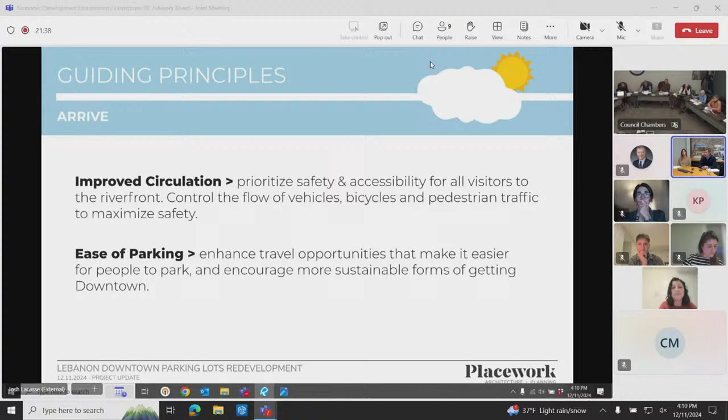They're not new. Improving the circulation for both vehicles, people, bicycles is a key goal, along with ease of parking. So making it easy for folks to get downtown, to park downtown, and in case of scenarios which provide housing, to store their car near where they live.

And finally, along the lines of sustainability, making sure that this project can be feasible without excessive subsidy from the city. Site sustainability, of course, we're on a riverfront, looking at ways of optimizing the natural environment and making sure that we are designing for resilience, etc. And of course, looking at both the direct economic benefits to the city and also the spin-off benefits of economic development, enhanced opportunities in the city, etc.

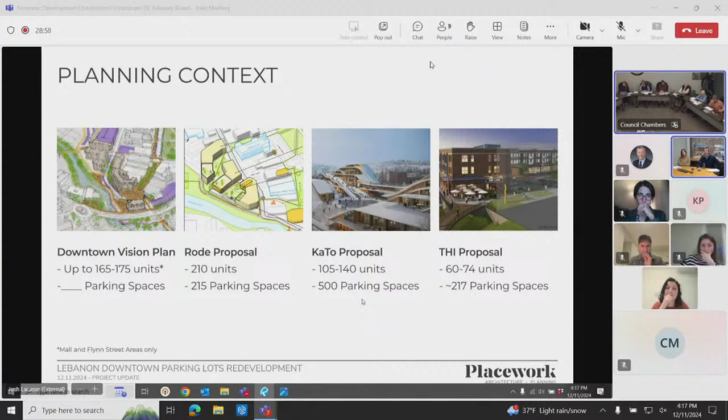So just for context, I think it's helpful to look back at these and understand what the various proposals were suggesting. When we go through our proposals or scenarios tonight, we're sort of falling between these two ones on the right as far as the number of housing units, although nowhere near the 500 parking spaces of the KaTo proposal.

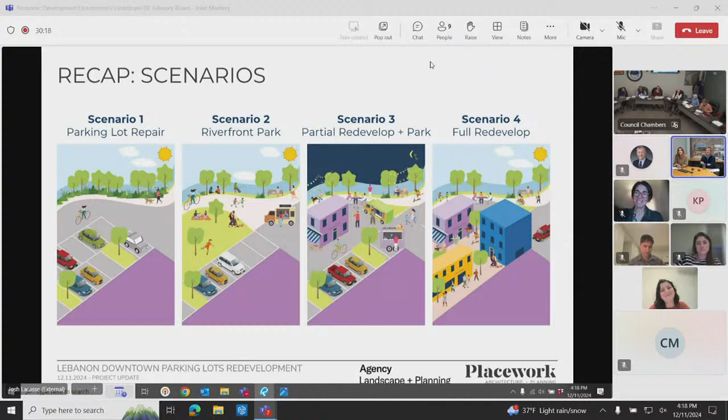And then the other thing I would say is that our materials are in flux. This is an in-stream presentation. You may see some numbers that are slightly off from the advanced packet you received. That's because we are continually working, even this morning, to revise everything. So bear with us, but the material you see now should be substantively similar to what you received in your packets. So Kate, do you want to take it away?

Sure. First, I'm going to walk us through our engagement efforts. So our flow for each of these scenarios, we'll be talking about engagement, talking about some precedent images that we drew some inspiration from, and then showing these overall site plans for each scenario.

So that summary slide from the previous slide where we're showing the different scenarios, we presented the concept of these at a September engagement meeting, as well as gave the guiding principles of the circulation and connection to river and asked for folks to add their comments to each of these. And so this is what we heard.

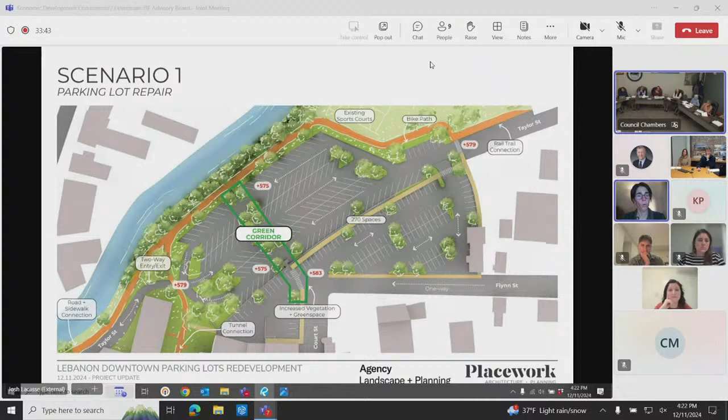You can also see that the parking lot is greener, and we've accomplished some of that extra space for the bike path by compressing the parking and making one-way drive lanes with angled parking. So as you come from Taylor Street, you have a kind of obvious one-way loop through. If you're moving through on Taylor Street, you can park or loop back to find additional parking opportunities. It's a little bit more intuitive and a little bit more compressed. We've lost a couple of parking spaces due to that additional greening and the opportunity to connect along the river, but still have the 270, which meets that core goal of existing capacity.

So if you go to the next slide, you'll see this in a perspective view. You're flying over the community center and the futsal courts right now. Looking at that parking area, you can see again that widened buffer by the river, the opportunity to bring a really generous bike route and rail corridor through there. And then the green parking lot with that green corridor that connects from Court Street directly down through the parking lot, with much safer pedestrian connections to the riverfront experience and the opportunity to make those east-west connections. The shade will also add additional comfort and human scale to the parking lot.

You can see at the bottom just a few of the key metrics and numbers, and we can continue to discuss these throughout. But obviously this has no residential units added, it's just a parking lot repair. You have those 270 spaces. It's on the order of $3 to $4 million to make this kind of repair, as well as the landscape improvements and to add soil depth and volume for trees to thrive long term.

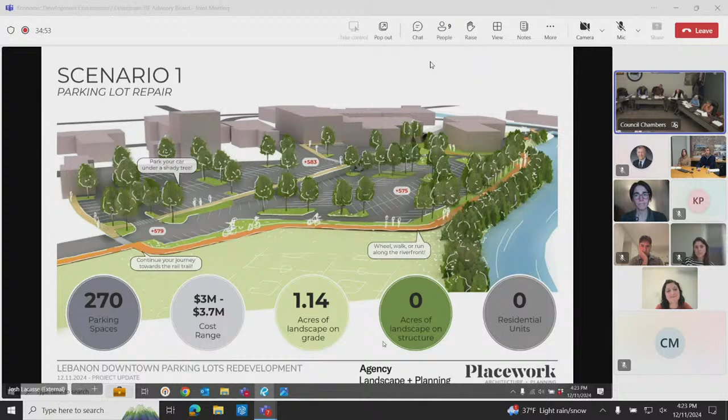So on the next slide, we're going to switch to scenario 2.

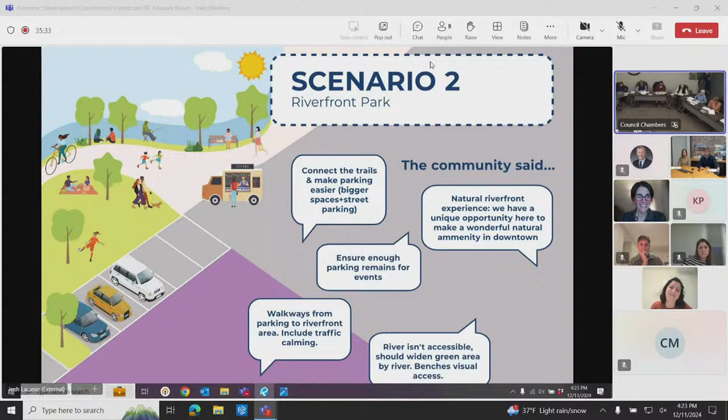Yes, and so for engagement, what we heard here was a lot of enthusiasm for getting this connection to the river, both to have some visual sight from benches to a walkway, as well as an opportunity to experience nature through plantings and having a park. I think there was also enthusiasm for maintaining this scenario, both to support events that could happen in this park as well as the needs of downtown. I'll pass it back to you, Kate. Yeah, so we can't underscore enough how much we heard that people really love the opportunity to look out over the river, to have this moment of parkland and better connection between downtown and the river.

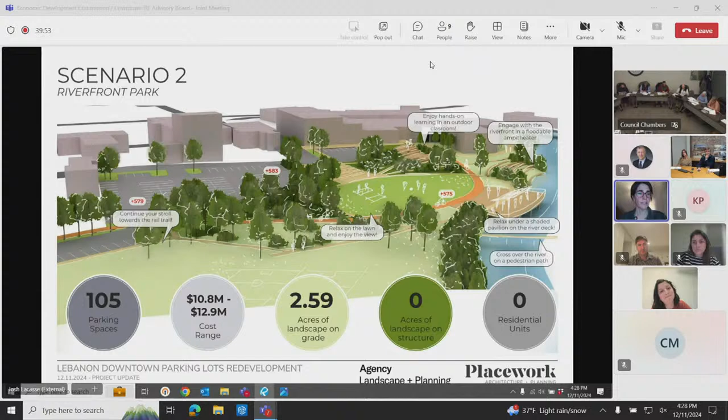Moving on to scenario 3. It seems that for a lot of folks, there was enthusiasm with this idea of a partial redevelopment, of redeveloping the upper level and keeping the lower level as a park portion to be able to maintain that access to the river. There was some excitement about bringing arts to the space, to the park or to the partial redevelopment.

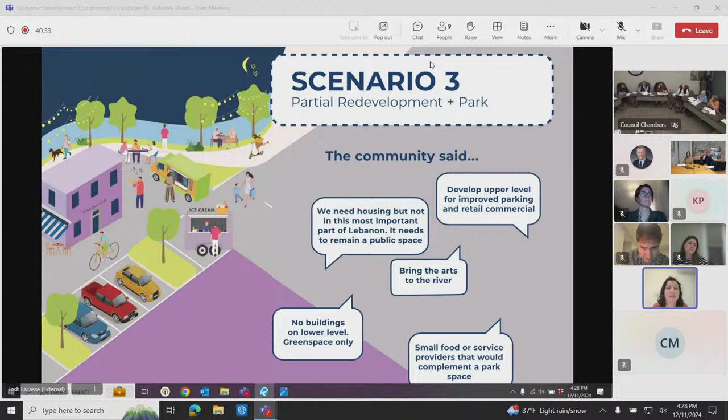And there was also just some places where folks either voiced uncertainty or questions around developing or putting housing here. So wanting to kind of understand the desire to put housing in a specific space. And I'll pass it to Barrett to walk through the scenario.

Here you can see an example right here in Cambridge of activation of the river space along the Charles River for arts and events, the terracing down with access for the pedestrian corridor along the actual riverfront, as well as the lawn. And so this, in combination with the next precedent, we've really started to take a look at the different ways of incorporating civic space with the riverfront.

So you're kind of starting to blend architectural elements with the free open public space and activation of that immediate riverfront corridor. Maybe there's a dining space area, lounging area, 24/7 access. So you can see how this starts to play out in the plan on the next slide.

This is where we started to incorporate the addition of the links into the scheme. So here you've got a parking garage, which is going to be about 144 parking spaces, as well as some parking space to the right.

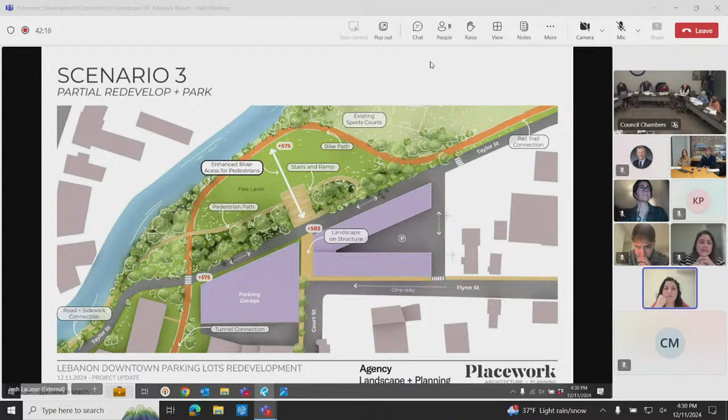Your landscape on structure makes an appearance, which ushers you down towards the riverfront. The grade change is negotiated here, starting at 583, with stairs and ramp taking you down to the river. Bike paths, all wheels path, is still connecting the rail trail from the east all through down south towards the tunnel, with a pedestrian walkway taking you from the flex lawn in the center back down towards the sidewalk connection on the west.

Taylor Street is making an appearance, cutting straight through the site, allowing active vehicular access coming straight through, as well as vehicular access stuff from Court Street.

And here you can see there's still robust palette planting and a lot of public open space as well for activities, for sports, for events. It's a pretty broad space, about half an acre, so less landscape than the previous scheme, scenario 2.

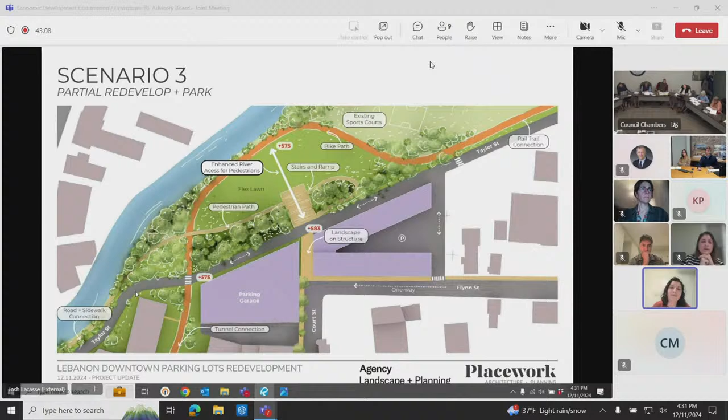So you still have a lot of space, and you can see here how that space is really incorporating the structural seat walls, maybe stairs that start to bring you down, getting this round view from the city down towards the riverfront.

And you can see how the all-wheels path really winds through the entire site, bringing you along towards the existing sports courts, the event space, the lawn along the river, and back down towards the tunnel and to the sidewalk.

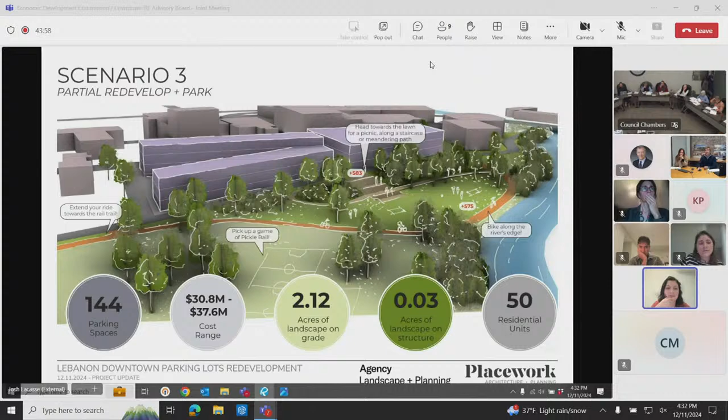Pass it on to Josh and Sarah to talk about scenario number 4. Sure, thank you guys. So I think that for scenario 4, defining the term full redevelopment is a major theme.

So in the public process, there was a lot of concern with, of course, the parking availability, making sure that there are places for people to gather and eat, those commercial activities that make downtown Lebanon special, and maintaining a robust connection to Colburn Park, as that really is the heart of the city. This site would be viewed as almost the counterpoint or the foil to Colburn Park.

So we have a bit of a progression here with scenario 4, so bear with us, we have 2 options to run through. Scenario 4A is probably the most similar to the downtown vision study.

This is where we really try to maximize that upper portion of the site for the built environment. This involves rerouting Taylor Street up toward Flynn and across the site to reconnect to where it comes out by the charter school.

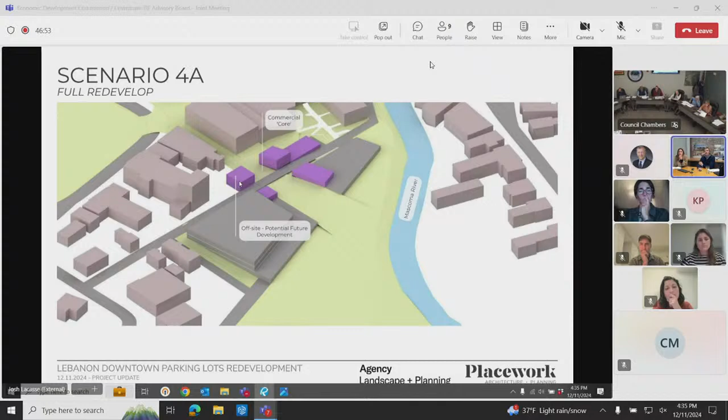So this one purple block that you can see in the white background here is actually off our site, but it's really to reinforce that idea of creating this commercial core.

And then when you layer in the rest of the purple, the light purple here would be the residential functions. You can start to see this building take shape. We might be able to link all of these pieces together and create a cohesive whole in the center here.

You may be able to frame a view from what is now Court Street, looking down toward the river, and then of course the bike path would need to come out of the tunnel, cross Taylor Street, and meander over to the river's edge around the site to get back to the reconnection on the other side.

Of course, this option offers one of the higher parking counts of the 4, and obviously that comes with one of the higher price tags.

I would say the other thing we noted after doing this option, we kind of took a step back and said, well, gosh, that's a really massive building. Of course, there is some precedent on the site for buildings of similar height, but when you look at the general mass of this, it's taking up a large area in comparison to some of the neighbors around.

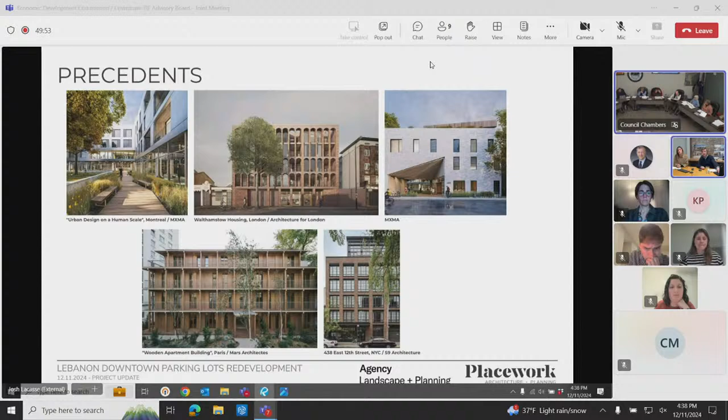So the thought process with this study was to take the idea of building clusters, apply it to the site, and try to see what kinds of space between buildings, or other spaces for engagement, we can create using a form and mass that has historic context and is really a vernacular type form.

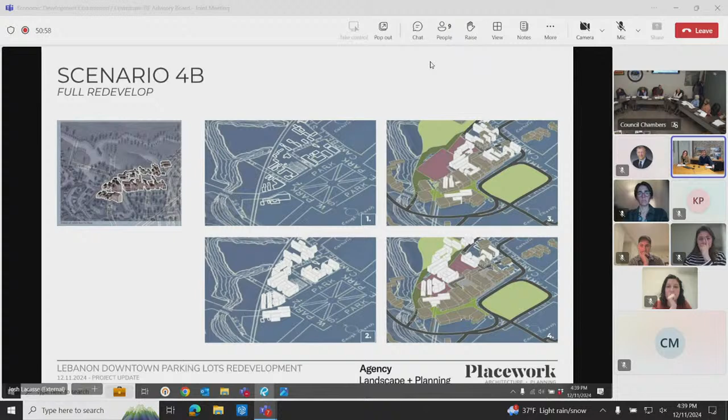So scenario 4B does a few things differently. Number one, it disconnects Taylor Street, so it would no longer be a through street here. Traffic would need to be rerouted, possibly around through Flynn Court, but also around Park Street and Colburn Park.

The other thing it did is really emphasize the rail trail, the multi-use path, as an organizing element of the site, which in turn reinforces the existing topographic conditions. So this yellow multi-use path you can see here generally follows the existing retaining wall or step in the grade of the site.

This also proposes to essentially deck over that lower parking area to create sheltered parking for about 108 cars.

And it proposes to parse the site into two pieces: one which would be essentially given over to a developer—that's this white dotted line you can see here—and the other would be retained by the city.

Day one, likely a surface parking area, similar to the existing paved area over near this part of the site. There would also be potential to build structured parking in that location at a future date if that were desired.

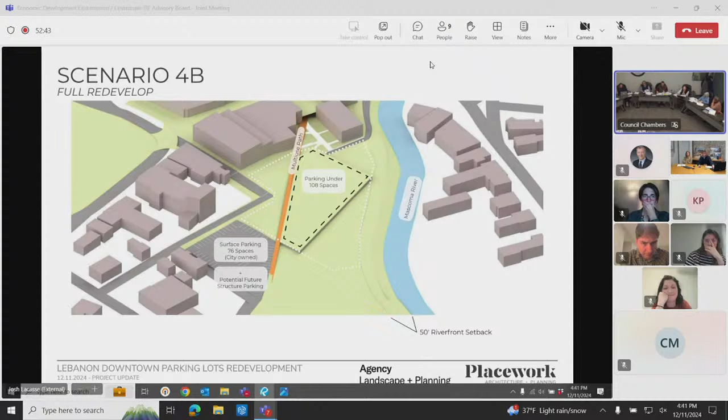We then extended this concept, similar thinking to the prior concept, developing a commercial core and human-centric spaces that would be publicly facing, potentially programmed with food or business use, while maintaining Court Street.

Court Street would be converted to a one-way, which would allow us enough space to maintain a half and half condition, splitting that space half for cars and half for a slightly narrower green connection down toward the river.

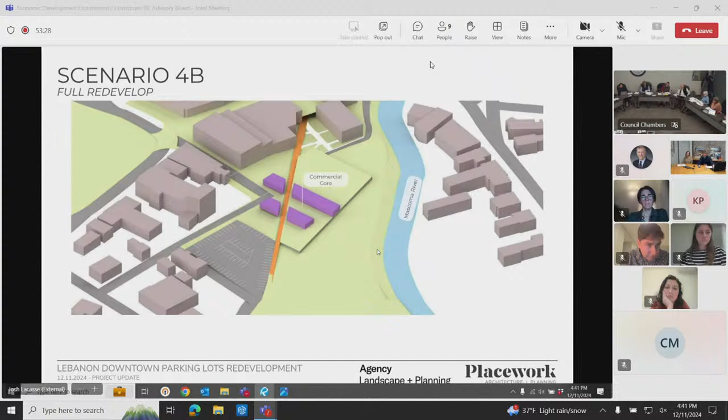Layering on the housing component, we talked about the use of this traditional gable form to create something with visually interesting spaces for people, and how these volumes come together to create open space in between that can be used by the public and the residents who would be living here.

So this would be the finished condition. You can see the rail trail threads its way through a series of overlooks and tunnels underneath the building to get to the other side.

Going through the numbers, this scheme has a slightly lower cost, primarily due to the more than slightly reduced parking. It has about 100 fewer parking spaces than the prior scheme, and 81 residential units compared to 90 in the previous scheme.

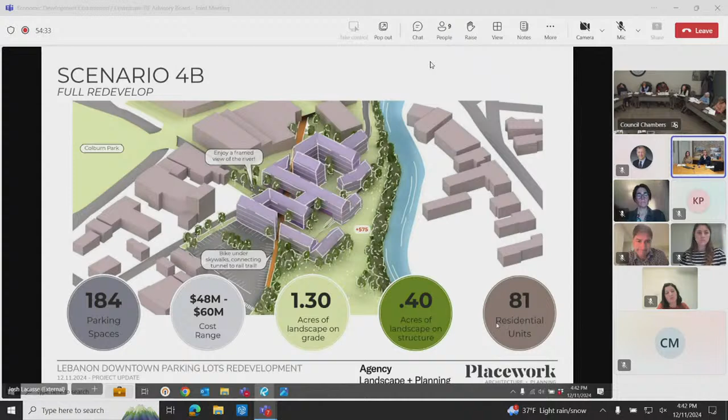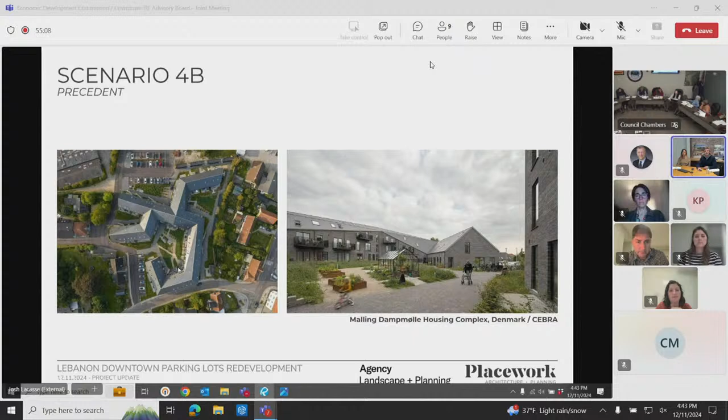Again, we like to look at examples of how others have approached this. This is another example of a built project that takes that fairly typical gable form and uses it in a slightly more contemporary way to create space between the buildings, offering space for people to go and socialize and engage with one another outdoors.

This is the plan comparison between the two. You can see they both use a similar diagrammatic approach, trying to create this axial connection from Colburn Park down to the riverfront, doing that in slightly different ways.

On the bottom you can see a quick perspective vignette of the appearance from across the river, showing again that idea of the very large mass of scenario 4A on the left, and the more broken down mass of scenario 4B on the right.

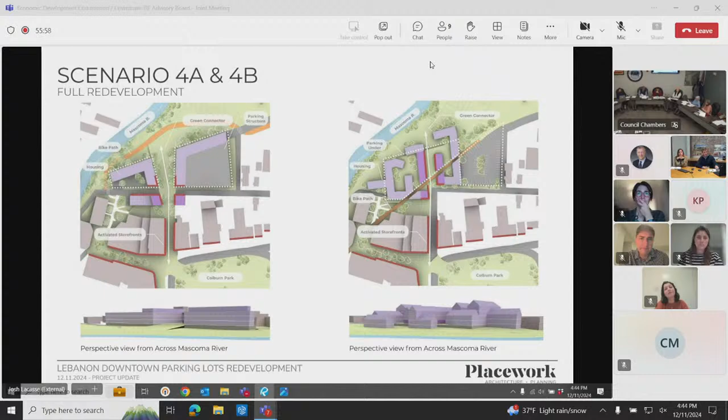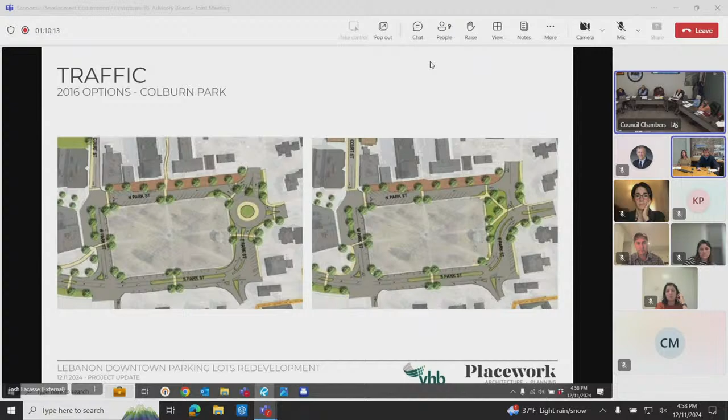And that is sort of what we have. We want to look ahead to the next steps, but I think I'll just run back to the scenario comparison slide, take a deep breath, let some of this sink in, and see if anyone has questions. No questions?

Can I ask if the latest slide deck could be emailed around? Because whatever I'm looking at doesn't really match up with some of the slides, particularly the scenario comparison looks a little different, and my version doesn't have cost estimates and all that. I think this is where the cost estimates are, that was just on our paper. Yes, we can, I will send out this slide deck. What ended up in the packet was my fault. That's what we saw when we previewed this with the consultants the week prior to Thanksgiving, and they've made further refinements over the last couple of weeks to get to what you're seeing tonight. But I've got this now, and I'll send it around. I have questions.

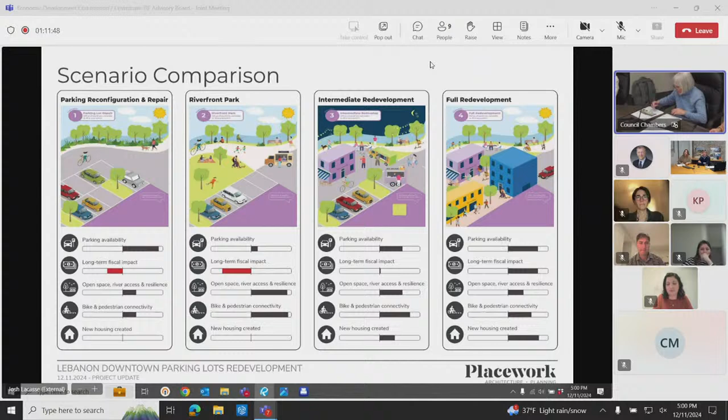Okay, I have more than one question. First, the parking numbers on the various scenarios—are those open, public parking, or do they include parking for the housing units? So each number of parking spaces on each scenario, is that just public parking, or does it include parking for the housing units?

I'd say that varies by example. The packet you were handed before the meeting has a little more information, I think page 1, on the assumptions for various schemes. If you look at that first page, we've itemized residential parking spaces versus replacement parking spaces—in other words, public parking, or parking beyond what's been dedicated to the residential units. We've allocated 1.5 spaces per unit. I don't believe there's a zoning requirement in this part of town for parking per unit, but this felt like a good median between 1, which felt too low, and 2, which felt like too much.

Is it my understanding our base need number today is 225 for what's used back there? Yeah, that's based on the percentage of use documented most recently this July, as a percentage of what's actually out there. I believe it was around 68%—Josh, correct me if I'm wrong. It was 68%, out of about 333 spaces. So theoretically you'd need 225 plus whatever you need for the new development, correct? Yes.

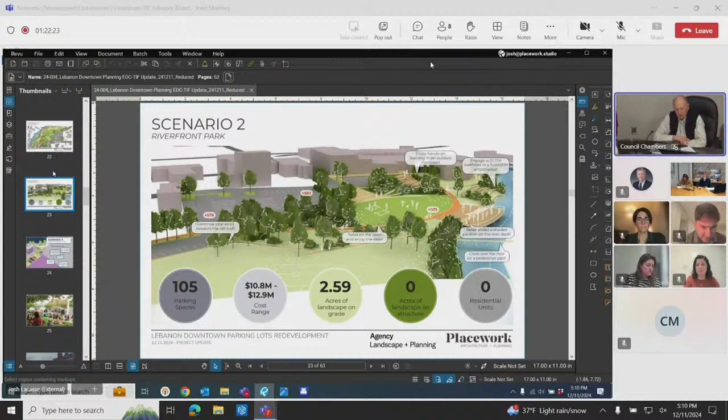Currently it's on the south side of Taylor Street. But I'm looking at taking those transitory or transit uses—by bikes or cars—and putting that in as the primary consideration, then building around that.

But certainly the upper parking lot, there's plenty of room up there for some kind of development. But I will say that the financial numbers are daunting, and given where we are with the budget session, we're certainly not looking to have the city incur any greater liability. So I'm looking at how the process came up with the 4 or 5 options, and the elements that went into building those. If those are the types of things we have, then clearly somewhere in that spectrum we'll be able to come up with something, the details for which may be very different.

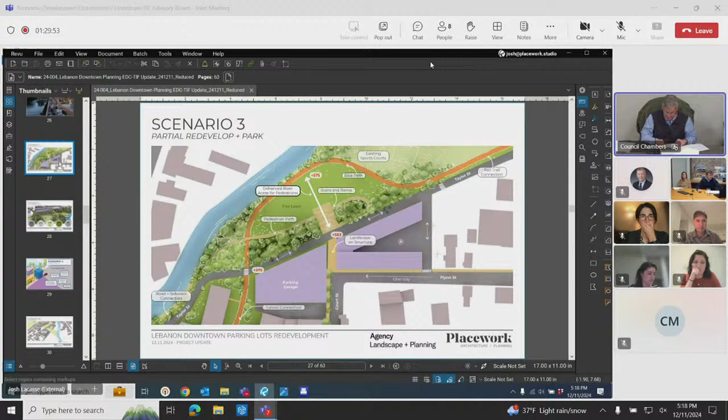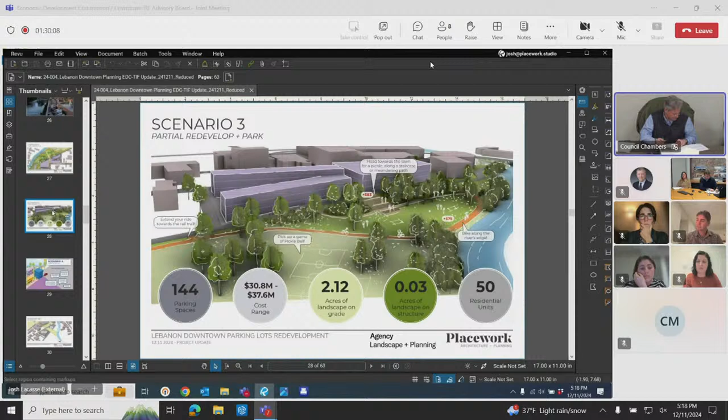My thought in looking through some of the fiscal impact numbers and cost numbers that were presented, kind of pinging on what Barry was saying, I was thinking the same thing. Most of the scenarios seem to be taking a lot of the parking or converting all the parking to park and putting underbuilding parking, like scenario 3, for example. The question is, could we retain some of the parking on the lower level, make a smaller park that does open up the river, does bring people down to the river?

And retain more parking? I think the other thing I noticed was it struck me that the taxable assessed values of the different scenarios seem light from what I know of values and costs right now. And I think the number of units in different scenarios, I'm not clear on if that's been maximized.

I think, to Karen's point, the public in the city and everybody is extraordinarily sensitive to additional hits to the tax base, and I think we should figure out ways to. Maybe nothing long term is a hit to the tax base, but the question is, are there other solutions to this that could be zero impact to the tax base, but also give the city a waterfront park?

And that's like a 2B, so are you kind of saying maybe we need like, is it 2A and 2B, the riverfront park option? I don't know, a toned down version of the riverfront? It's a 2B, or maybe it's a 3B, I don't know. But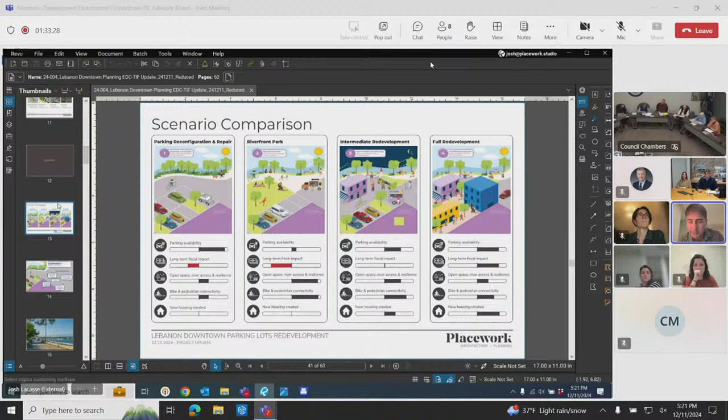So if you scroll to the developer schemes, we did test this, and figured it was something the various groups would want to know. Essentially, if you look at the developer schemes, we ran a model for about 160 units, and at that level, financially, it's essentially a self-supporting project where it doesn't require the city to put in additional money, and it produces more positive fiscal impact. The issue is it's essentially a giant development site. You can add public open space, and there can be park space, but most of it's on structure, and it just feels very different. The question is whether that meets the goals of the community.

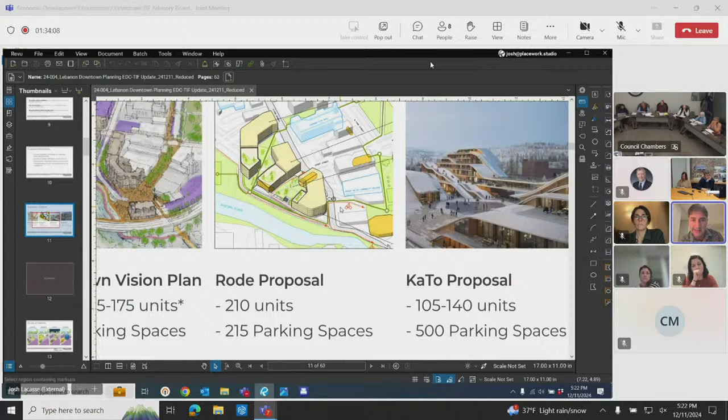But if you look at the Rode proposal, something closer to that where they're showing these open spaces on top of structure, and they've got 210 units, you could probably reduce that a little bit, but essentially that's the scheme. So we decided as a group not to go there, but that's kind of what it takes from a unit count.

Christine? I was just remembering those previous suggestions that we decided didn't fit what we wanted to do, and I don't think the public was much interested in having so much development in the parking lot because they were worried about losing access to any open space and blocking it. I mean, that would just be another big mass of brick.

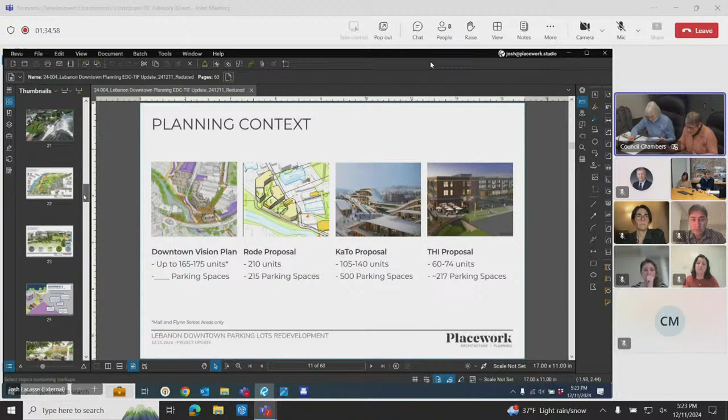But when you were commenting on the financials, I don't really understand how to look at money very well, but it occurred to me that the way you have the fiscal impacts, when you're using number 3 and 4A and 4B, how do we think about annual cost of any of those 5 proposals? Because even something that's maybe generating taxes, it looks like is going to be costing the city money to have there.

So it looks like the only two that are gonna cost the city anything are Don't Do Anything and the Riverfront Park, and I don't think that's what the numbers are saying, but maybe there's another way of showing what each of those proposals actually costs the city to have. Maybe I'm looking at it the wrong way.

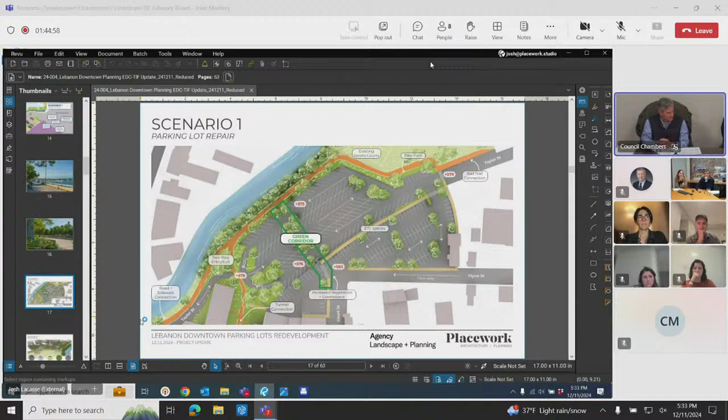I still have a day job that needs to get finished, so I'm going to break up the quorum of the TIF committee, but I'd like to suggest to our consultants, first of all, thank you for your time today. Interestingly, you heard fewer comments about design and more about economics, so I think some flexibility in how you design, with sensitivity to the economics, would be very helpful when you present. Otherwise, thank you very much, and thank you, committees.